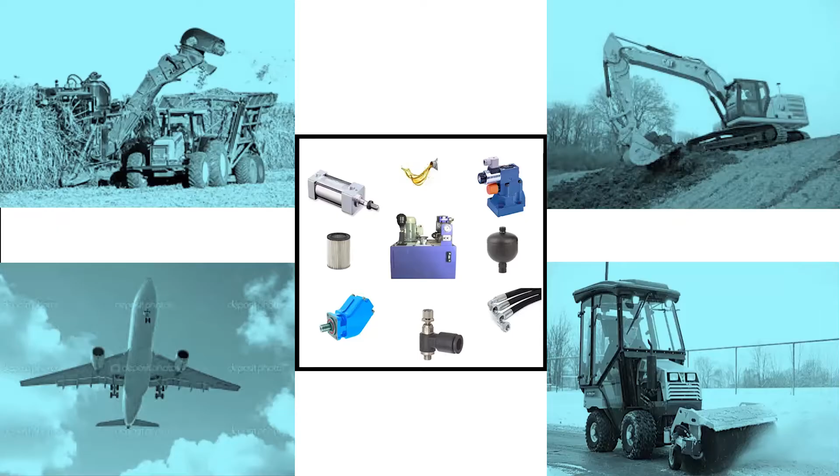This is in case of the single stage compressor. Now let us see the two stage reciprocating piston type air compressor. Here we are using two pistons of different diameter driven by a rotating crankshaft to pressurize the air. The pressure rating is up to 30 bar and even more. From the figure, here I am showing you the two stage reciprocating type compressor.

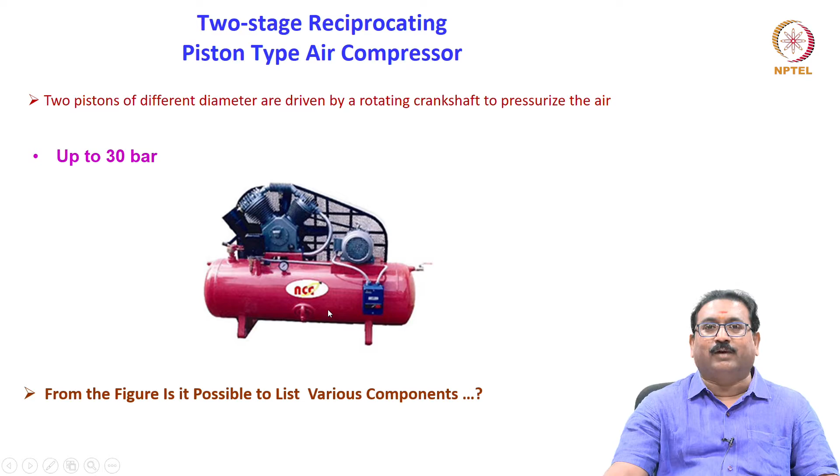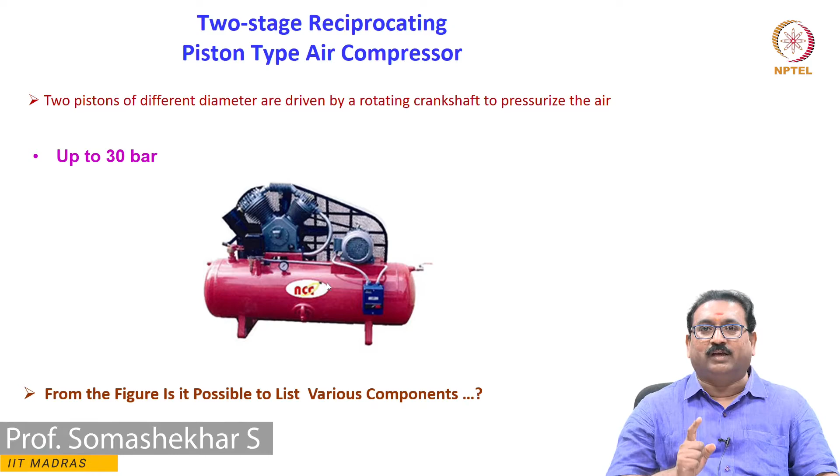You have seen these in many places in the workshop when putting air in your two-wheeler or cycle. As an engineer you must know the various parts of the compressor. Let us see this quickly. I will show you the external parts, then we will go to the internal parts.

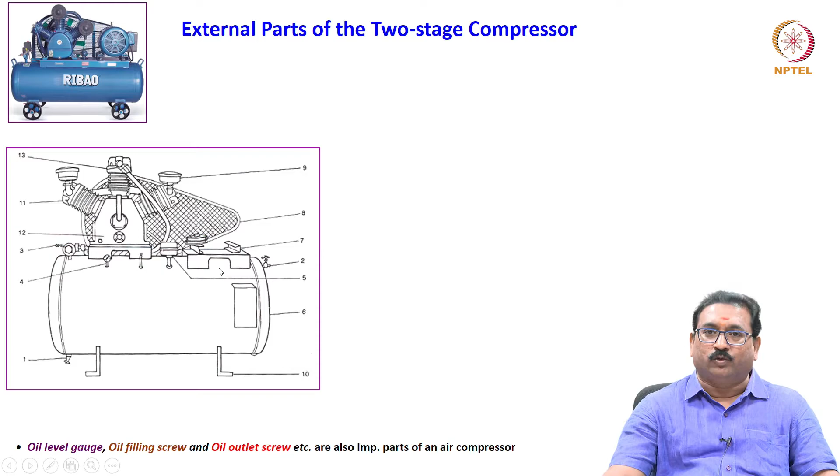See here, the first one is the drain valve or water outlet, always at the bottom of the receiver tank. That is why you should not take dry air from here, always from the top, remember. The second one is the compressed air outlet, always on the top side.

The third one is the safety valve. As I have told you, if the required pressure and volume is reached, it will automatically stop. The fourth one is the pressure gauge, to monitor the pressure.

What is the fifth one? The fifth one is the pressure switch, to switch on and switch off your motor. The motor I have not shown here.

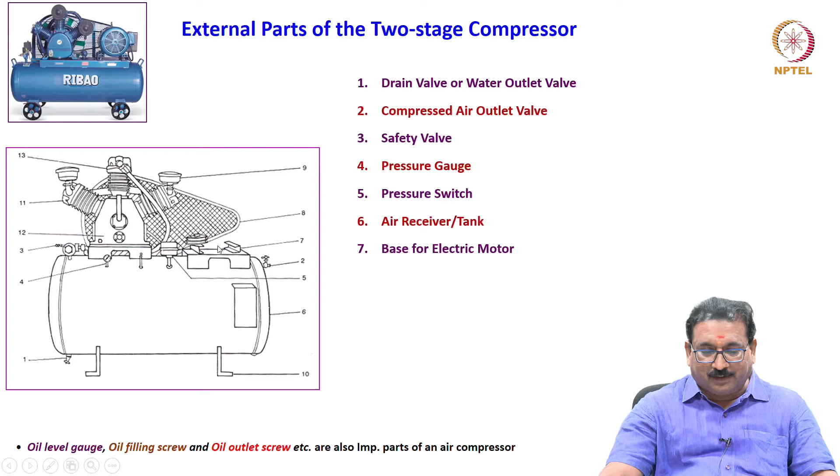The sixth one is the air receiver or tank. The seventh one is the space provided to put the electric motor. The eighth one is the safety guard. The ninth one is the suction filter or intake filter.

The 10th one is the compressor stand, rigidly mounted on the ground. The 11th one is the first stage cylinder.

The 12th one is the oil reservoir or oil tank, for the lubrication purpose.

Here is the second stage cylinder, as I have told you - first stage cylinder, second stage cylinder. Also remember, the oil level gauge, oil filling screw and oil outlet screw are important parts of the compressor. If you see any compressor physically, you should be able to identify these important parts.

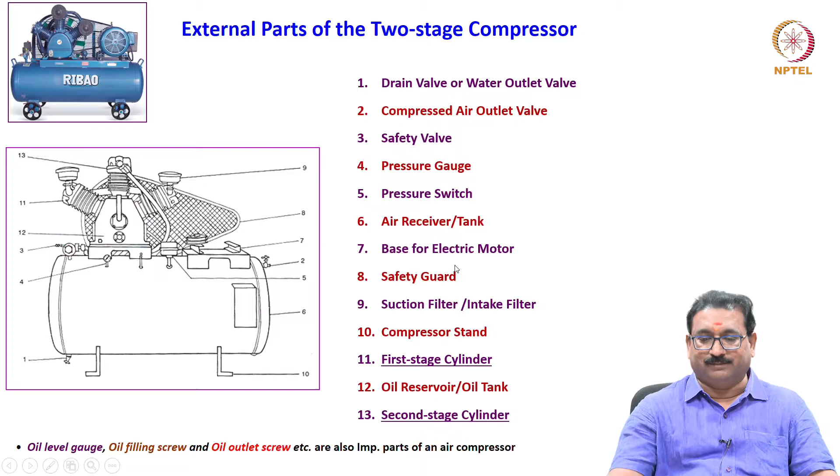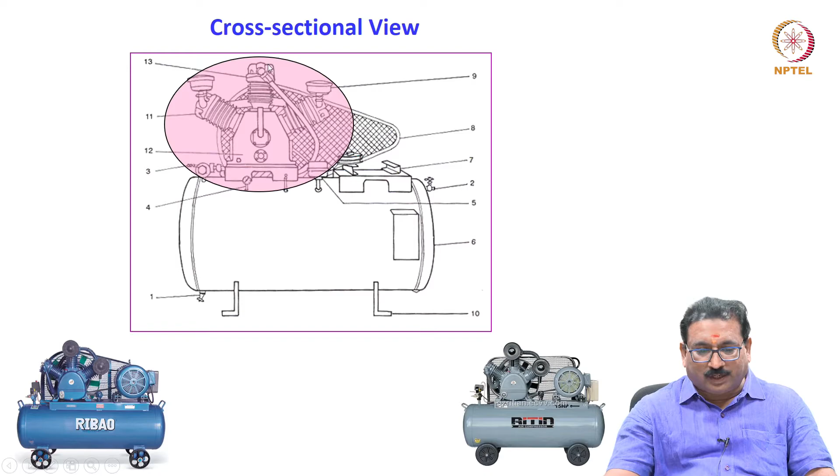Now this includes both the single stage and two stage, whatever it is, with intercoolers in between and many other things. I will show you the cut section of this now, with what I have marked here.

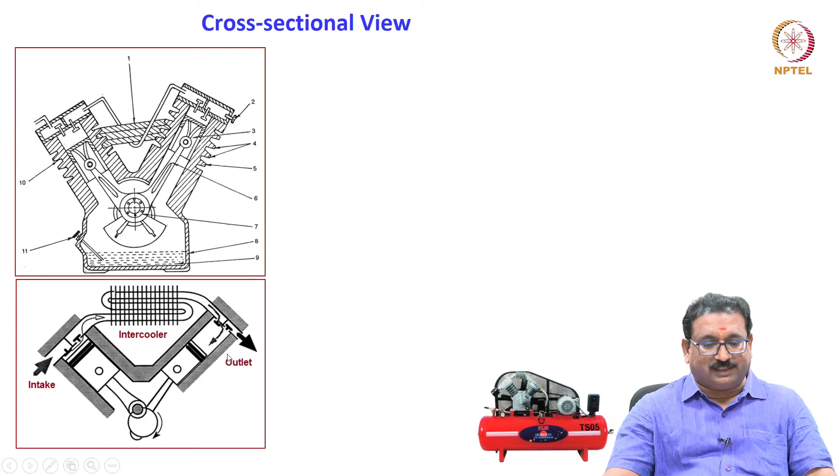You will see here the cut section, how it is - the inlet, outlet, whatever it may be. You will see the first stage cylinder, second stage cylinder. Let us see now.

Here the first one is what we call the intercooler element. The intercooler is nothing but a heat exchanger. The air, when it moves from the first stage to second stage, should be cooled. That is why intercoolers or heat exchangers are required, and they can be water cooled or air cooled.

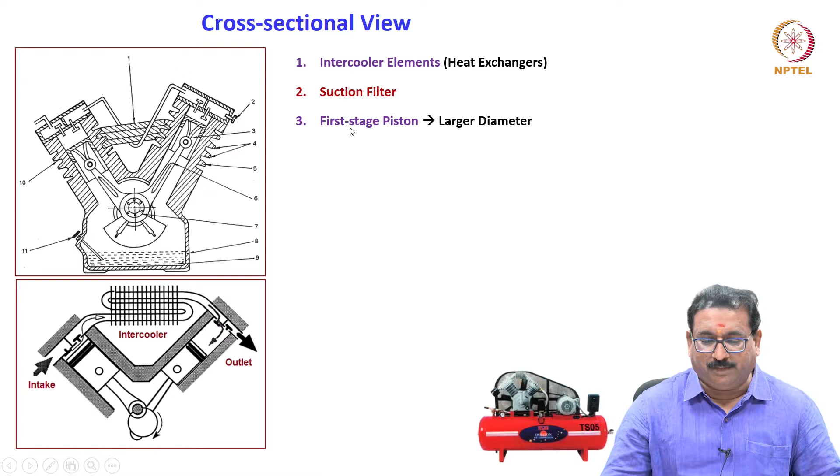Where is the suction filter? Number 2 here is the suction filter. Number 3 is the first stage piston, shown here, it is the first stage, here it is the other way - first stage cylinder, larger diameter.

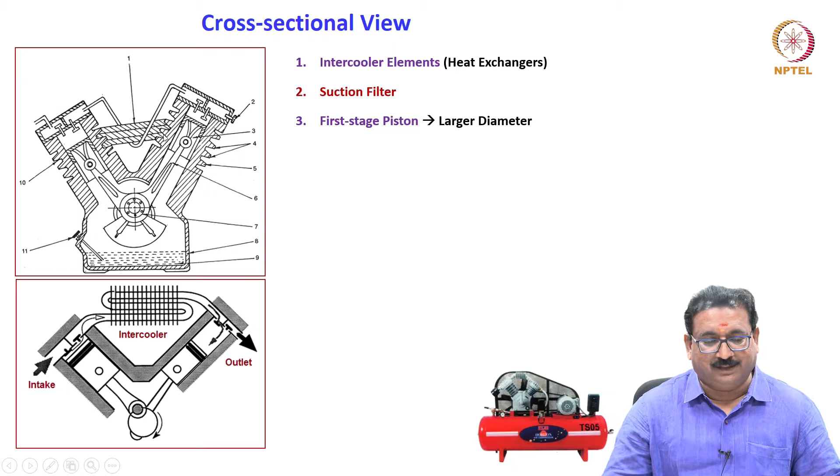Don't confuse with this figure - it has a larger diameter and a smaller diameter. The larger diameter is always the first stage, the smaller diameter is the second stage. You see the pistons. Cooling fins, as I have told you, are also provided, for cooling the compressed air. The fifth one is the first stage cylinder, also known as the low pressure cylinder compared to the other.

Then the piston rod - this is the piston rod. Then the crank and crankshaft arrangement, number 7, which is connected to both the piston rods. Please see, both piston rods are connected. Then the crankcase, the 8th one, full crankcase.

The 9th one is the oil container, with oil inside. Then the second stage cylinder, as I have told you - here in this figure it is the second stage cylinder, the high pressure cylinder, where compression takes place again. Then the 11th one is the dipstick and oil filter.

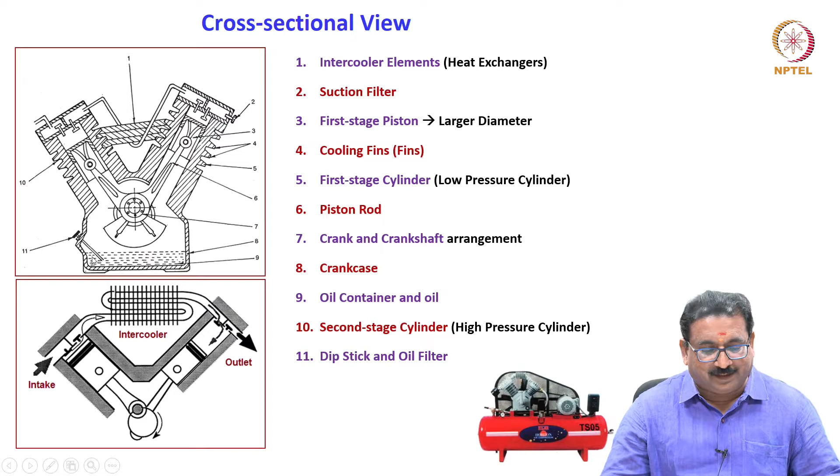Now how it works, I will tell you very quickly. As we know, the first stage cylinder is a larger diameter and the second stage cylinder is a smaller diameter piston. What is the working principle? Very quickly friends, when the piston is moved down from the top dead center to bottom dead center, air is sucked through the filter; filters are not shown here.

Then when it moves up, what happens? The air sucked is discharged through the intercooler and it enters the second cylinder. Then when it moves, again it will compress a second time, then it will go to the receiver tank. You will see here friends, cylinder 1, cylinder 2, first stage, second stage. The same figure is for easy understanding.

I have shown the inlet valve and outlet valve here. As the piston descends during the inlet stroke, descends means from top to bottom, the inlet valve opens and the atmospheric air is drawn into cylinder 1 after passing through the suction filter. As the piston passes the bottom of the stroke, the inlet valve closes. When it moves here, see here, the inlet valve closes.

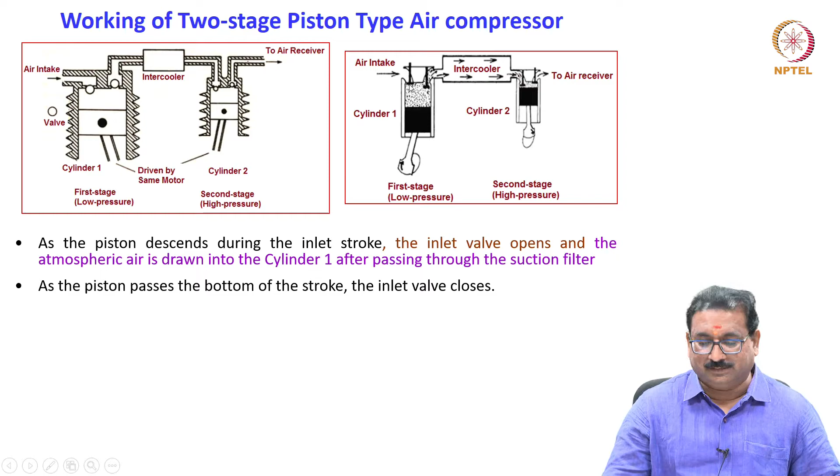The exhaust valve opens, allowing the air to be expelled as the piston rises into the cylinder 2 through the intercoolers. See here, when it moves up, this will open. Here, through the intercooler, air is entering the next cylinder.

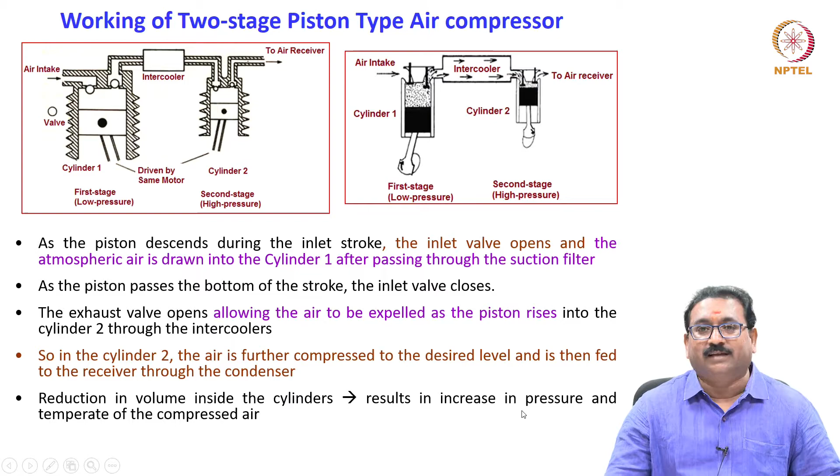So in cylinder 2, the air is further compressed to the desired level and is then fed to the receiver through the condenser. Reduction in volume inside both cylinders results in an increase in pressure and temperature of the compressed air. Okay, very quickly you will see. So the hot air is cooled, as I have told, by intercoolers.

How is it? Air circulation uses circulating fans that circulate the air through the fins on the cylinder and the intercoolers, or water circulation provides water jackets around the cylinder, and water is also circulated in the intercooler tubes.

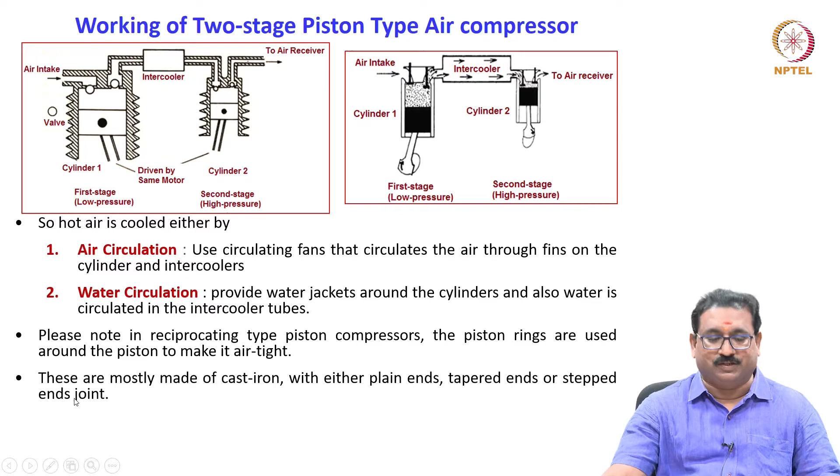Please note, in a reciprocating type piston compressor, piston rings are used around the piston to make it airtight. They are mostly made of cast iron with either plain ends, tapered ends or stepped end joints. The compressor needs reasonable lubrication to maintain a longer trouble-free life.

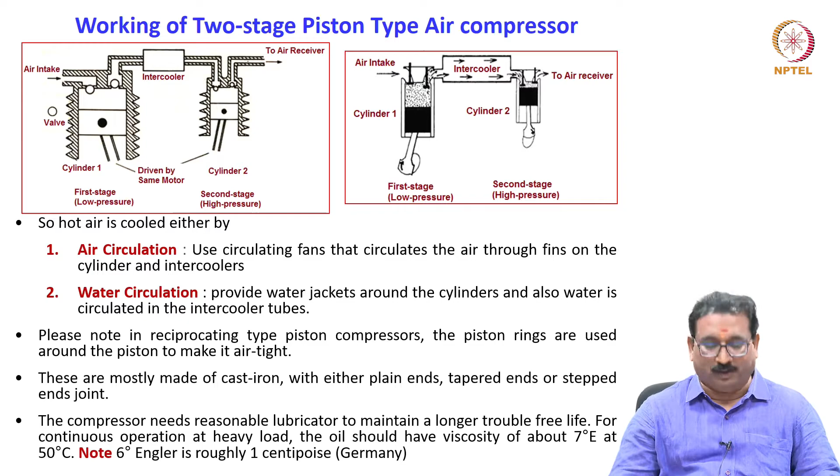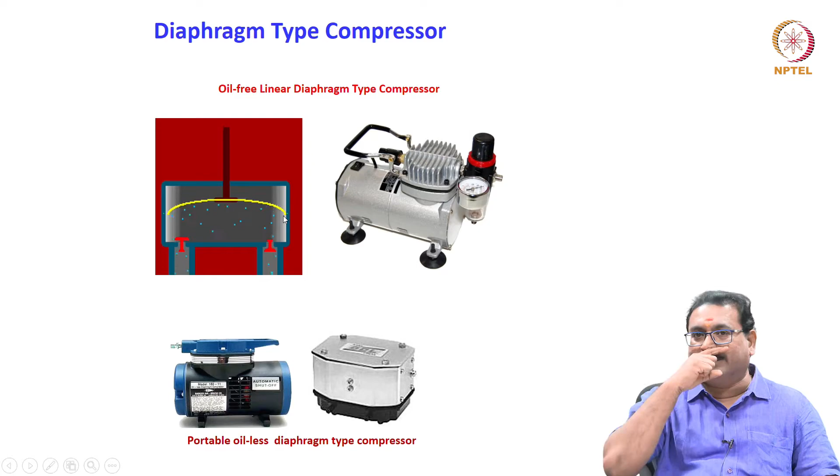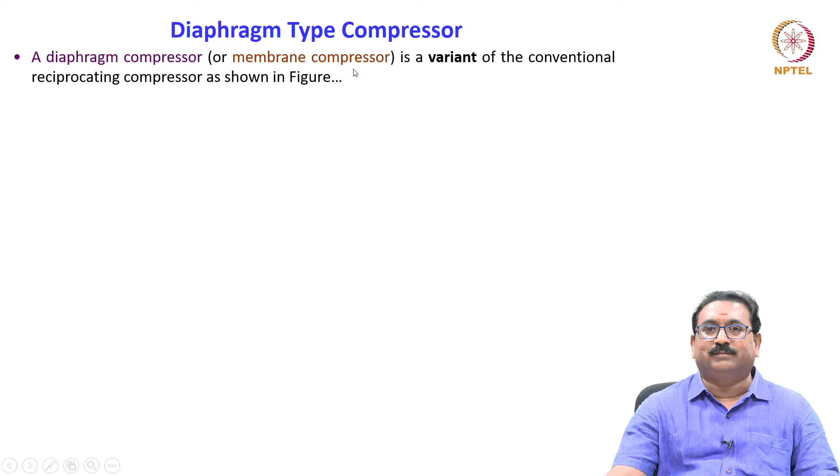But the only problem you will see here is that the movement of this flexible membrane is very small. That is why it is used for low pressure applications. Quickly we will see what a diaphragm type air compressor is. A diaphragm compressor, also known as a membrane compressor, is a variant of the conventional reciprocating type compressor. It comes under the reciprocating type, as I have shown you here.

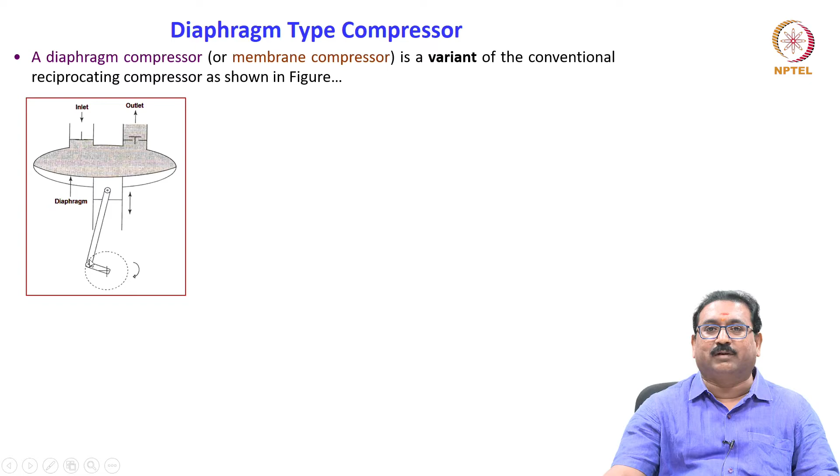It is the same thing. This is a piston, and this is a diaphragm element. This will move up and down due to the movement of the piston. Here you will see the piston is separated from the friction chamber by a flexible diaphragm. That is, air does not come in contact with the reciprocating parts. Thus, the air is always kept free of oil.

Compression of the air occurs by the movement of the flexible diaphragm as the piston reciprocates up and down. You will see here, when the piston moves down, air will be sucked. When it moves up, air will be discharged. These are limited to very small capacity as the diaphragm displacements are very small.

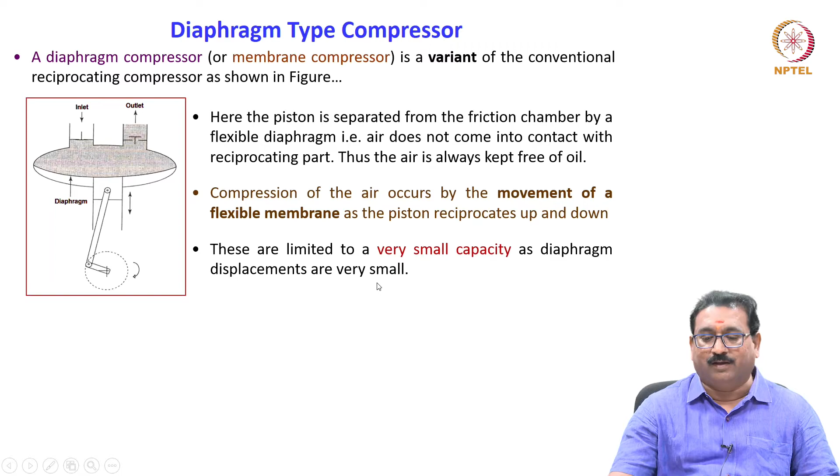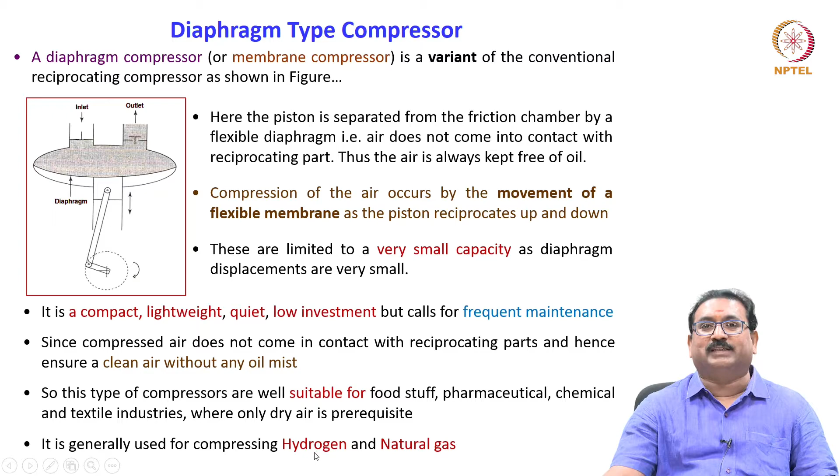It is compact, lightweight, quiet and low investment, but calls for frequent maintenance, because the flexible diaphragm is very sensitive. Since the compressed air does not come in contact with the reciprocating parts, it ensures clean air without oil mist, so this type of compressor is well suited for foodstuff, pharmaceutical, chemical and textile industries, where only dry air is a prerequisite. It is generally used for compressing hydrogen and natural gas.

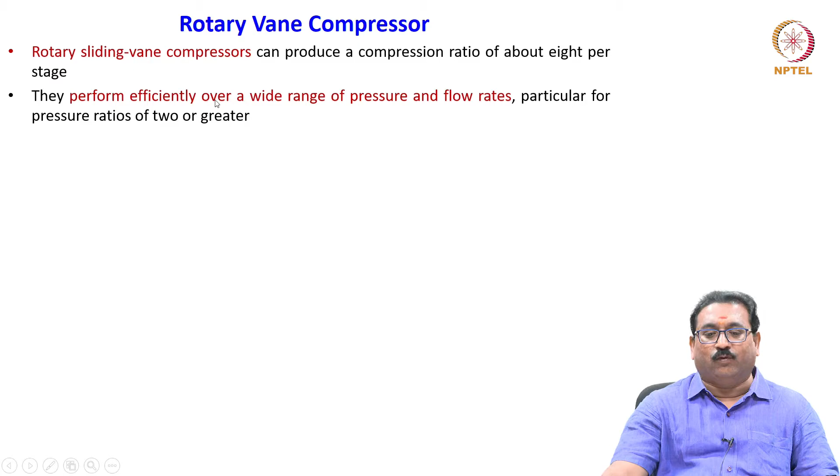Now we will move on to the rotary type compressors. What are these? We will see the rotary sliding vane first. A rotary sliding vane compressor can produce a compression ratio of about 8 per stage. They perform efficiently over a wide range of pressure and flow rates, particularly for pressure ratios of 2 or greater.

They are pulse free and therefore can be used without a receiver if needed. A simple schematic diagram of a vane compressor is shown in the figure here. Please see here, friends, all the arrangements here, the mating elements are similar to your vane pump. Here you will see this is a rotor block, which is a slotted rotor; slotted vanes are there, slots are there, a slotted rotor it is. Then the cylinder block you will see.

The rotor and cylinder blocks are offset, you will see the axes are offset. Then vanes are there; these vanes are inserted in the radial slots of the rotor block. When the rotor rotates, the vanes will reciprocate in and out. The compressor consists of a simple vane type rotor enclosed in a stator body, having a low pressure and a high pressure bore for 2-stage machines.

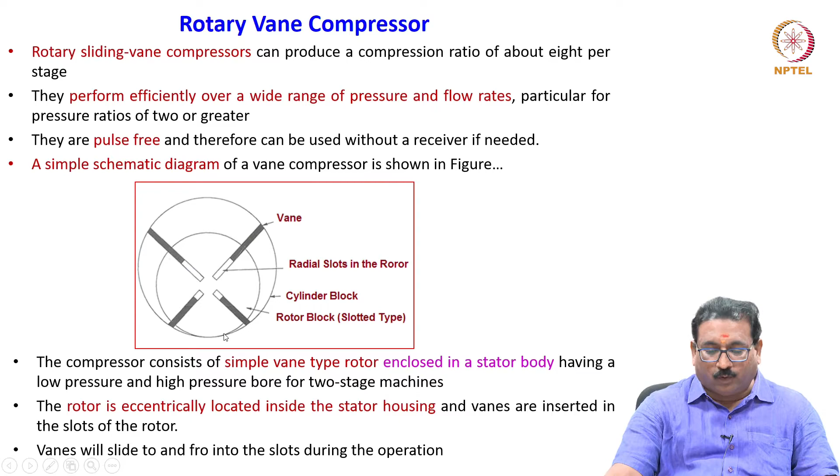The rotor is eccentrically located inside the stator housing and vanes are inserted in the slots of the rotor. These vanes will slide to and fro in the slots during operation. For the purpose of lubrication, oil is injected into the housing at both stages and performs the following functions: lubricating the bearings, gears and many other parts, cooling the air while it is being compressed, and sealing all the clearances.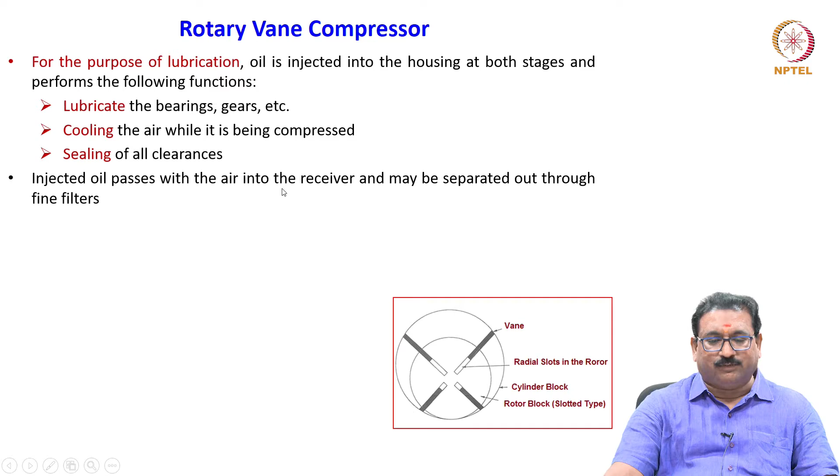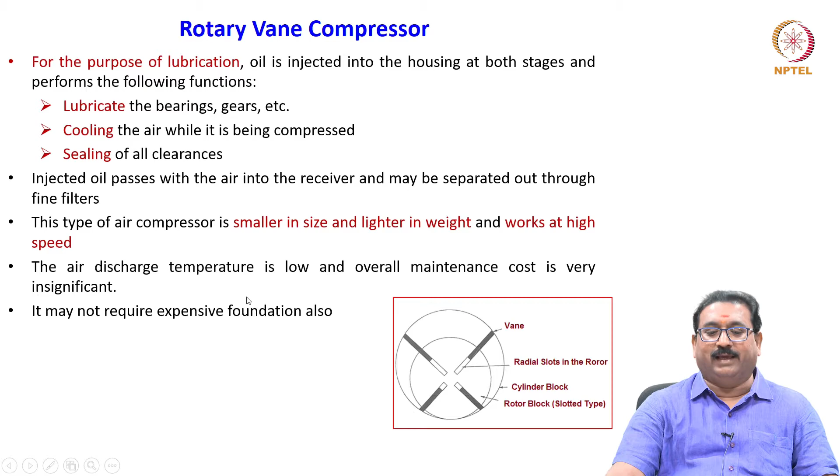Injected oil passes with the air into the receiver and may be separated out through fine filters. This type of air compressor is smaller in size, lighter in weight and works at high speed. The air discharge temperature is low and overall maintenance cost is very insignificant. It may not require an expensive foundation either.

Now we will move on to the lobe compressor. As I have told you, based on the lobes, 2 lobe and 3 lobe compressors are there. Let us see the 2 lobe, also known as the twin lobe compressor. What is it? The 2 lobes are enclosed in the casing. This whole is the casing.

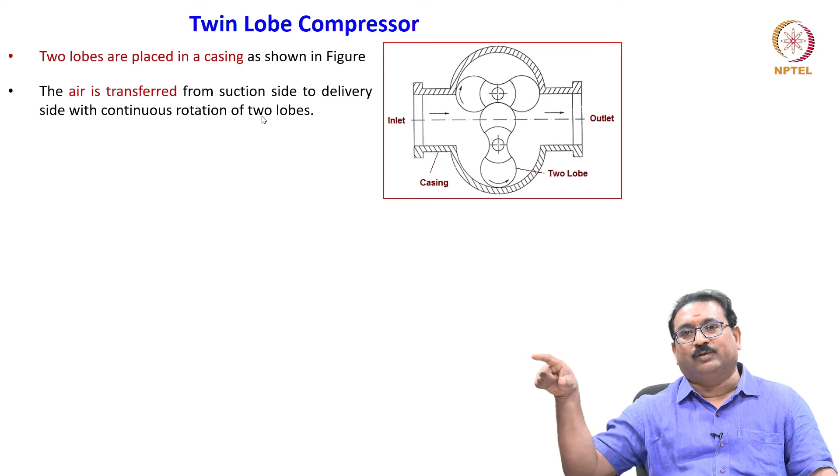The air is transferred from the suction inlet to the delivery side with the continuous rotation of these 2 lobes. They rotate because one is connected to the motor, meaning the electric motor; when it rotates, the other will move. They transport the air from suction to discharge. There is practically no volume change here. The pressure generated is generally very low and it is mostly used for low pressure applications. No internal compression takes place, but the impeller forces the air through the discharge opening against the back pressure of the system.

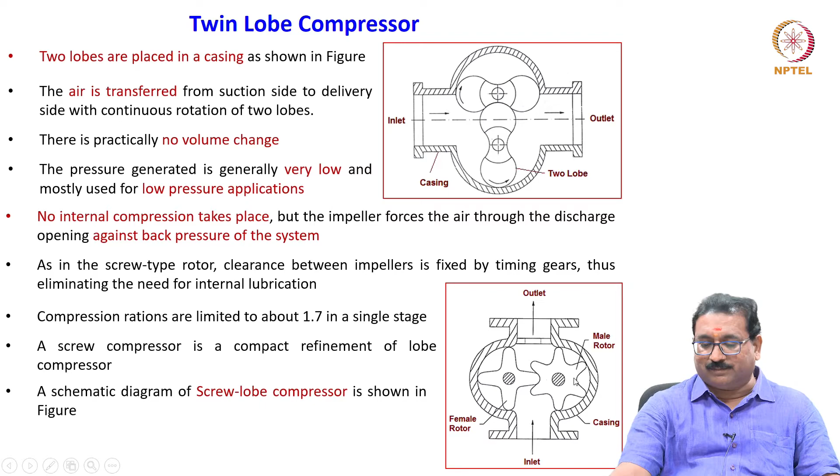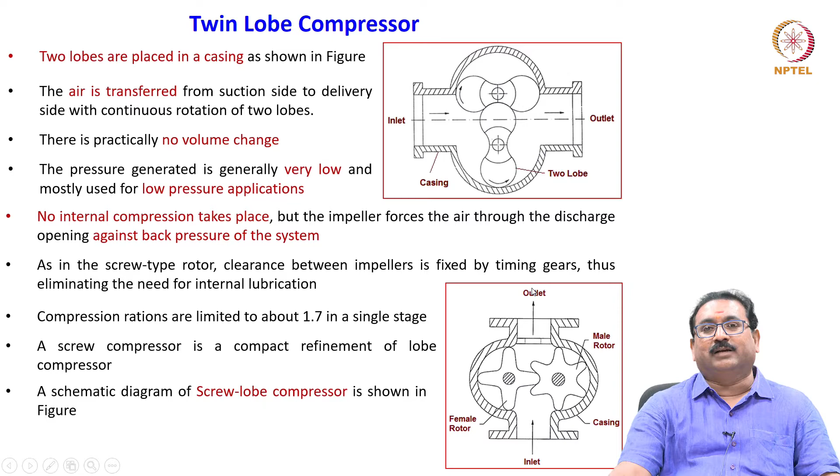As in the screw type rotor, clearance between the impellers is fixed by the timing gears, thus eliminating the need for internal lubrication. Compression ratios are limited to about 1.7 in a single stage. A screw compressor is a compact refinement of a lobe compressor. A schematic diagram of the screw lobe compressor is shown in the figure, which consists of a male rotor and a female rotor enclosed in the housing. Air is sucked from the inlet and only transferred from the inlet to the outlet.

Now we will move on to the rotary screw type compressor. In the rotary screw type compressor, 2 screws, one with a convex contour and the other with a concave contour, generally called the male rotor and female rotor respectively, are made to rotate by means of a gear train or other mode outside the compressor casing, thereby sucking air through the inlet port into the chamber, compressing it inside the chamber, and finally discharging it through the outlet port.

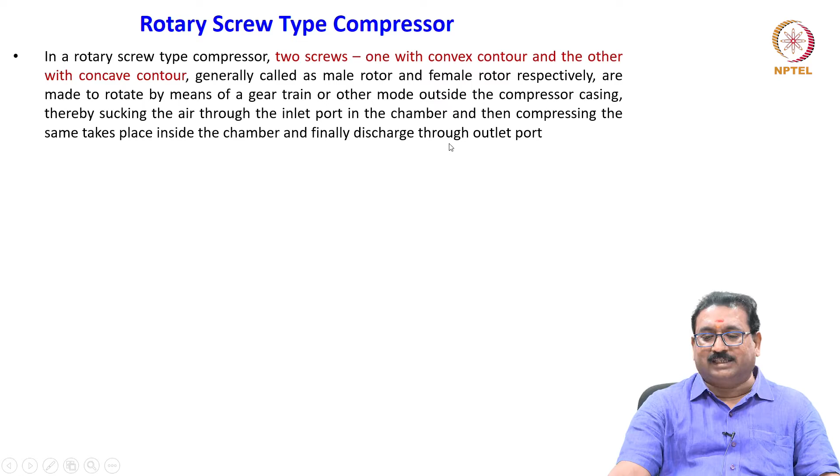Compression and discharge. Screw compressors are high speed machines, which necessitates the use of suction and discharge silencers and other means to reduce the noise level. The air delivery is usually oil free unless the compressor is of special design, in which case oil is injected for cooling and sealing of the clearance space.

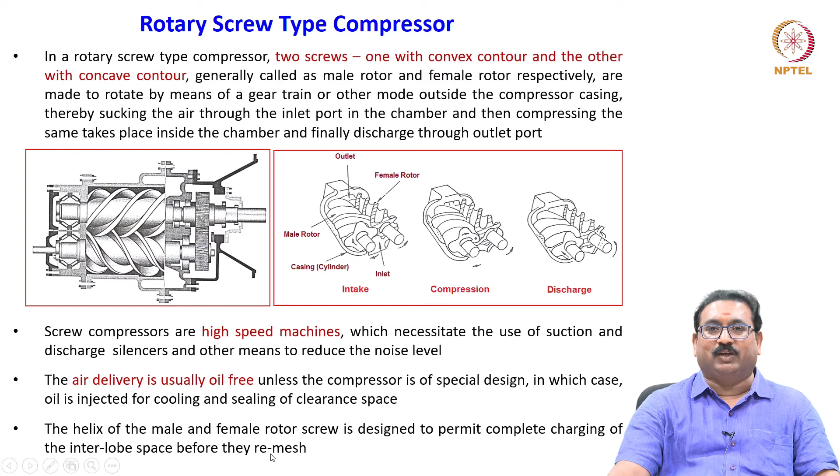The helix of the male and female rotor screws is designed to permit complete charging of the interlobe space before they remesh. On completion of the filling operation, the inlet ends of the male and female lobes begin to re-engage each other, the volume of this space is reduced, compression begins, and the air is discharged at the other end. This is virtually a continuous process, one lobe following the other very closely, so that almost pulsation free compressed air is obtained.

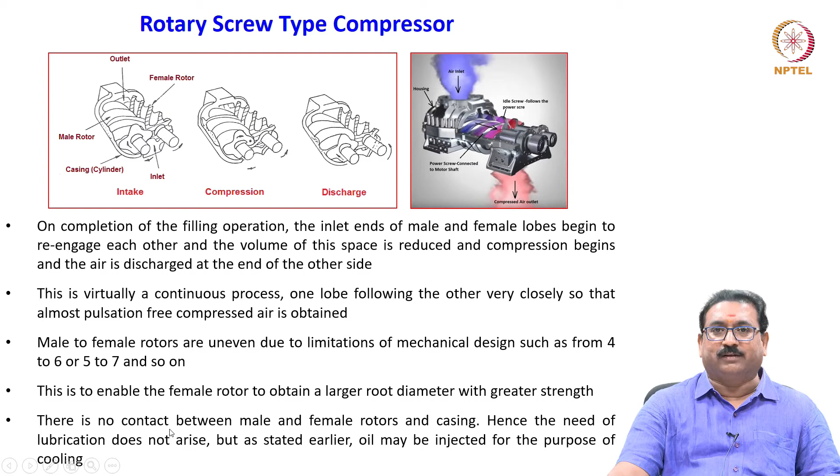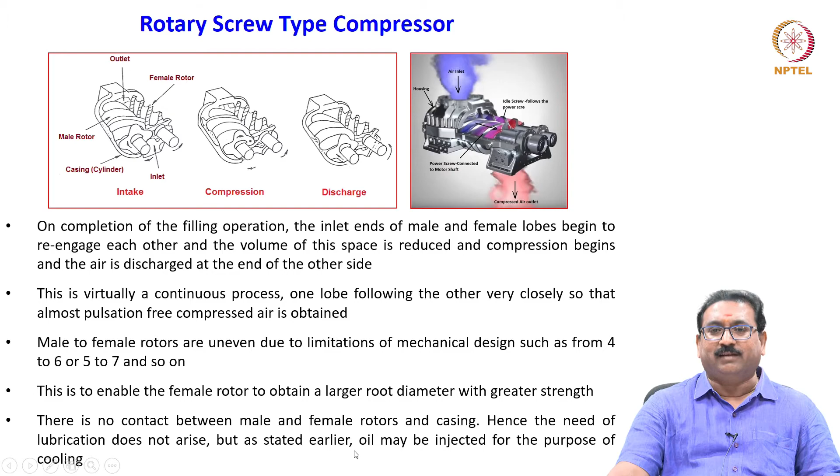Male to female rotor lobes are uneven due to limitations of mechanical design, such as from 4 to 6 or 5 to 7 and so on. This is to enable the female rotor to obtain a larger root diameter with a greater strength. There is no contact between the male and female rotors and casings. Hence, the need of lubrication does not arise. But as stated earlier, oil may be injected for the purpose of cooling.

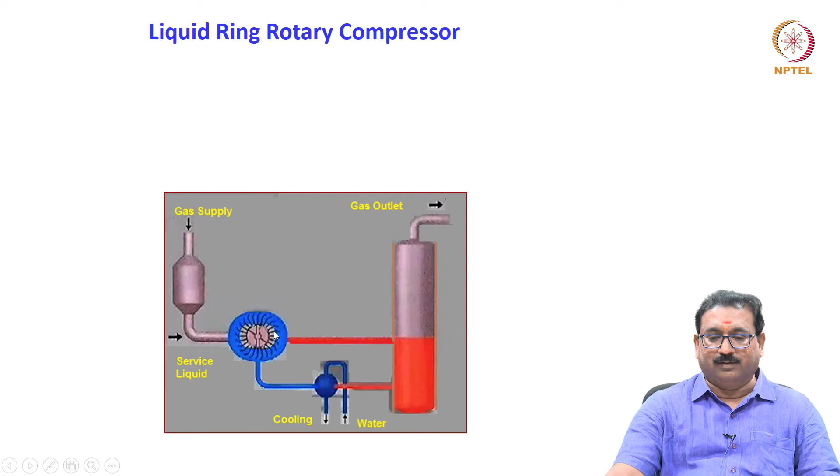Now, we will move on to the last type of rotary compressor, the liquid ring rotary compressor. Typically, a liquid ring rotary compressor is used as a vacuum pump, but can also be used as a gas compressor. It is similar to a rotary vane pump, with the difference being that here the vanes are an integral part of the rotor and churn a rotating ring of liquid to form the compression chamber seal.

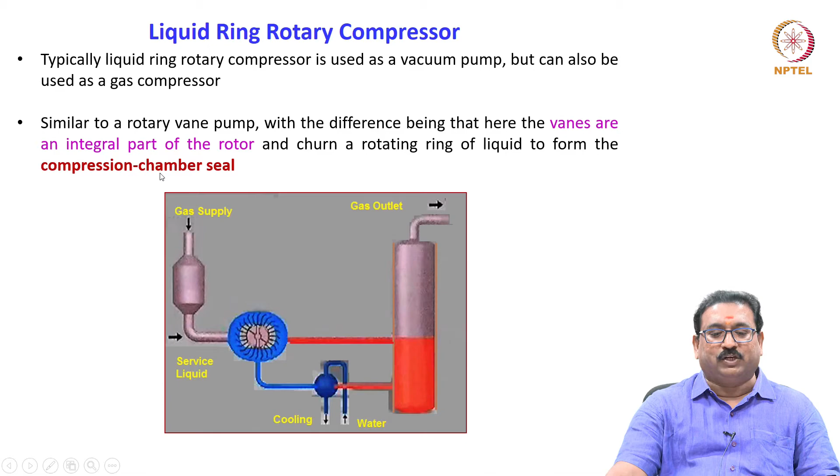Here you will see all vanes are an integral part of the rotor. The liquid ring rotary compressor consists of an impeller with at least 12 or more fixed forward curved blades, which is mounted eccentrically in the drum shaped casing between the two end plates. This is an impeller and this is a casing, mounted eccentrically.

As the impeller rotates, the sealing liquid moves out by centrifugal force to the walls of the casing, forming the ring. The air is drawn into the compressor by the expanding pockets trapped between the liquid ring and the impeller hub. This is the increasing volume. Air is trapped here between the liquid ring and these pockets.

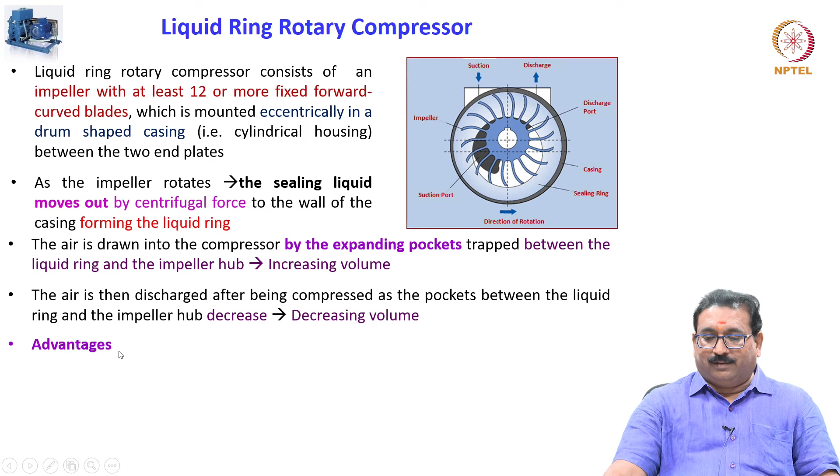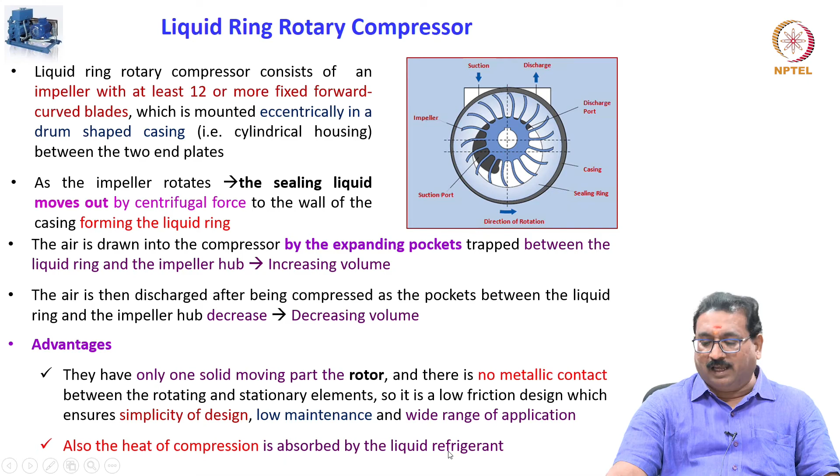The air is then discharged after being compressed, as the pocket between the liquid ring and the impeller hub decreases, through the discharge port. The advantage is they have only one solid moving part, the rotor, the impeller, and there is no metallic contact between the rotating and stationary elements. It is a low friction design which ensures simplicity, low maintenance and a wide range of application. Also, the heat of compression is absorbed by the liquid which forms the ring.

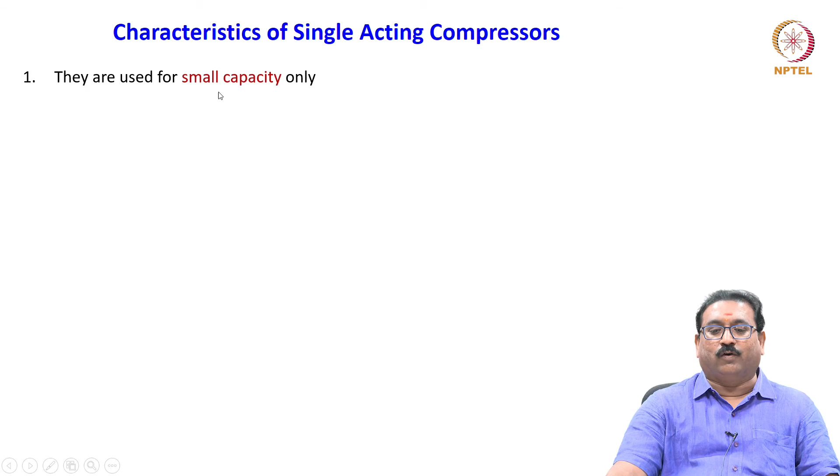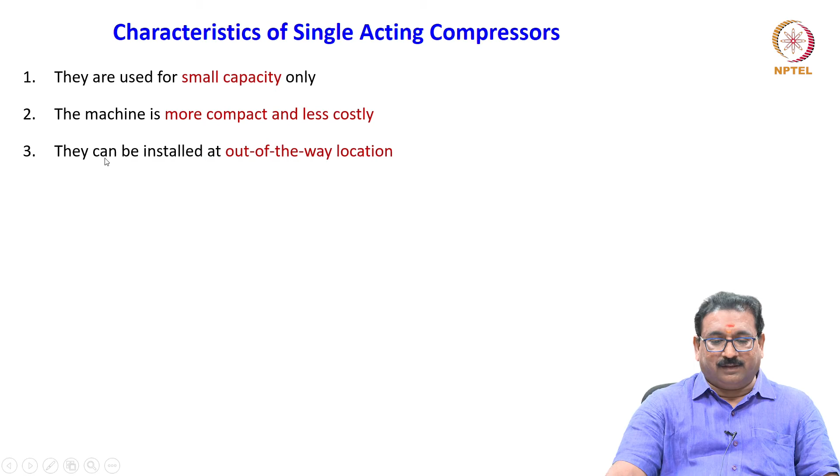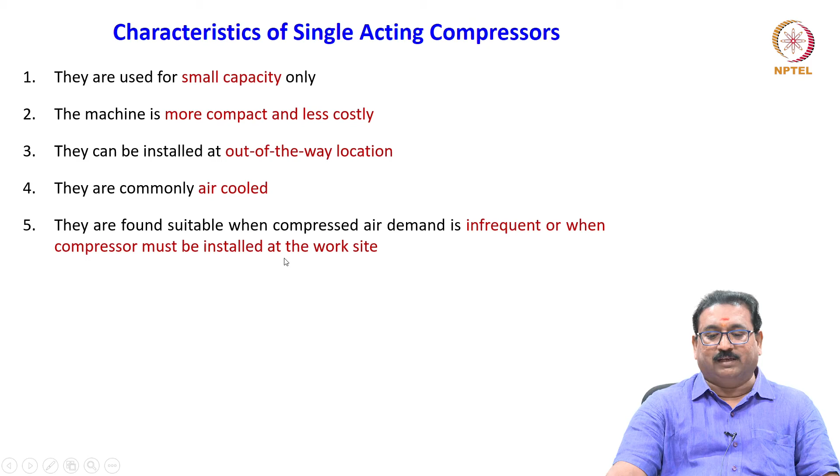Now, quickly we will see the characteristics of single acting compressors. They are used for small capacity only. The machine is more compact and less costly. They can be installed at out of the way locations. They are commonly air cooled. They are suitable when the compressed air demand is infrequent or when the compressor must be installed at the work site. Similarly, we will see some of the characteristics of double acting compressors.

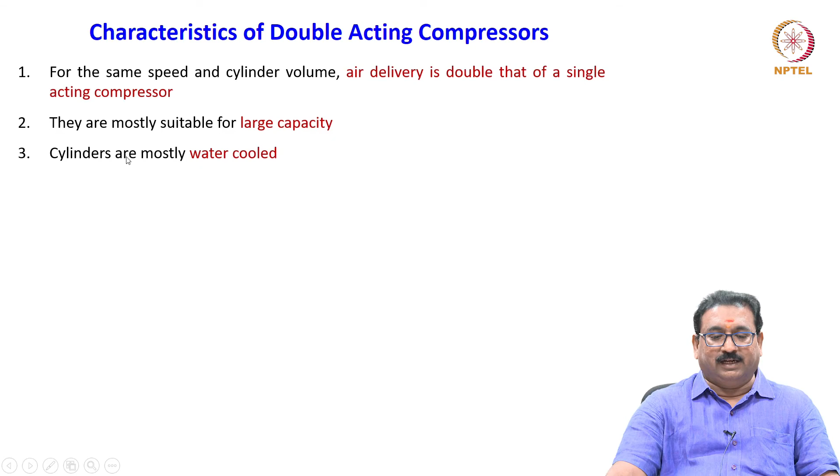For the same speed and cylinder volume, air delivery is double that of the single acting compressor. They are mostly suitable for large capacity. Cylinders are mostly water cooled. They are normally used for continuous and heavy duty work. Higher speed of piston while reducing the size of compressor may contribute to greater wear of the piston rings, cylinder liners and packings. Preferable piston speed for a small capacity compressor is 300 meters per minute, for a large capacity compressor 250 meters per minute. Lower discharge temperature, mostly 240 degrees centigrade for single stage and 140 degrees for two stage compressors.

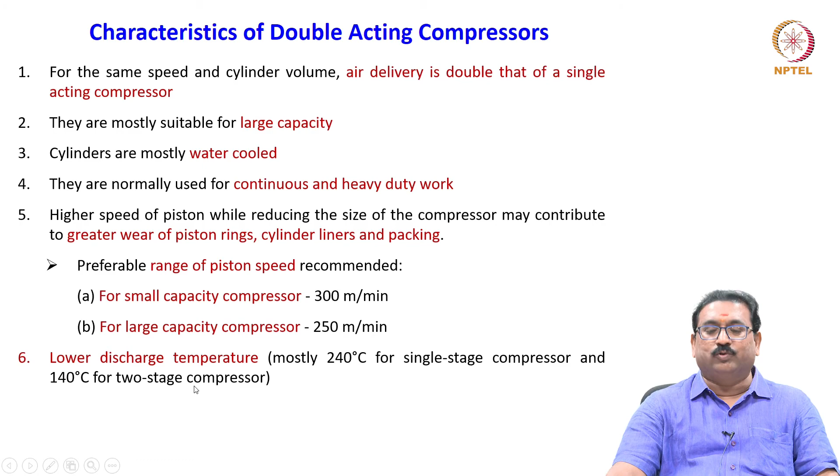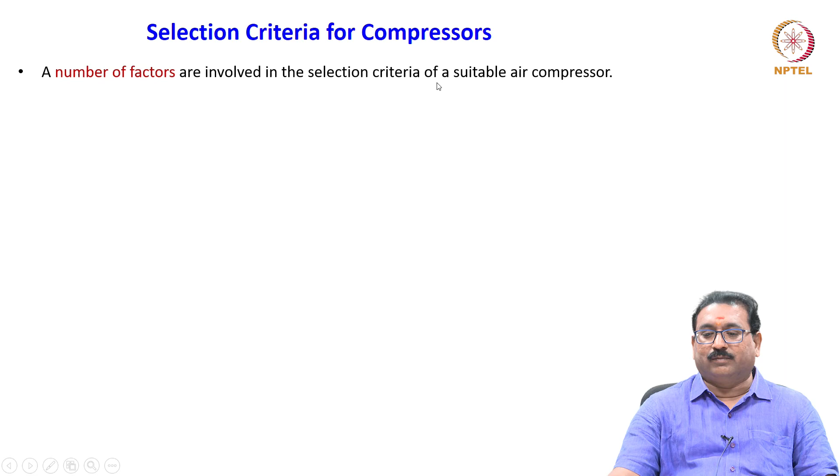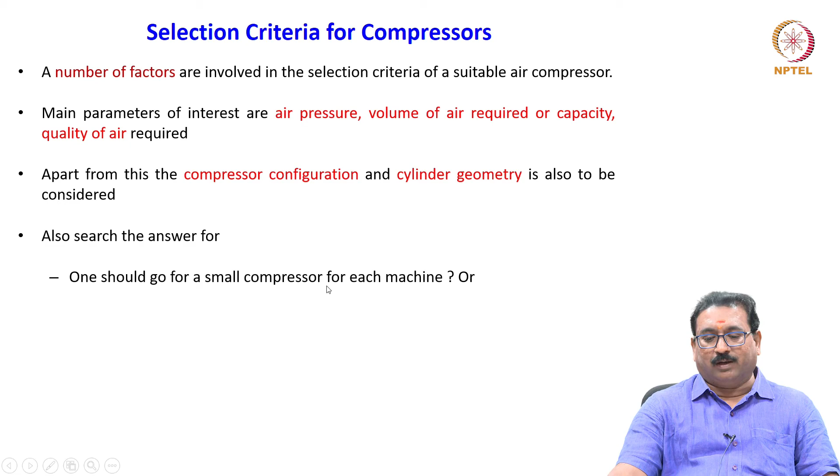Let us move on to selection criteria for compressors. A number of factors are involved in the selection of a suitable compressor for the particular application. The main parameters of interest are air pressure, volume of air required or capacity, and quality of air required. Apart from this, the compressor configuration and cylinder geometry are also to be considered. Also ask whether one should go for a small compressor for each machine, or a centralized compressor like a powerhouse. The answer will depend on the pipeline layout, system requirement and the distance of the user machine from the plant.

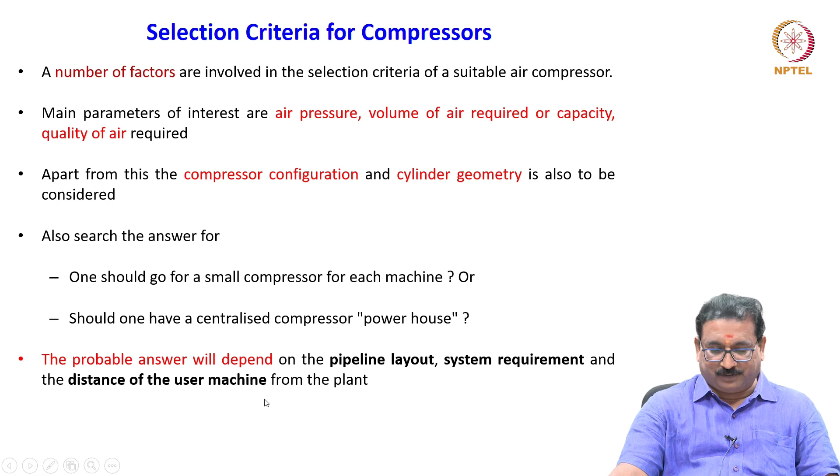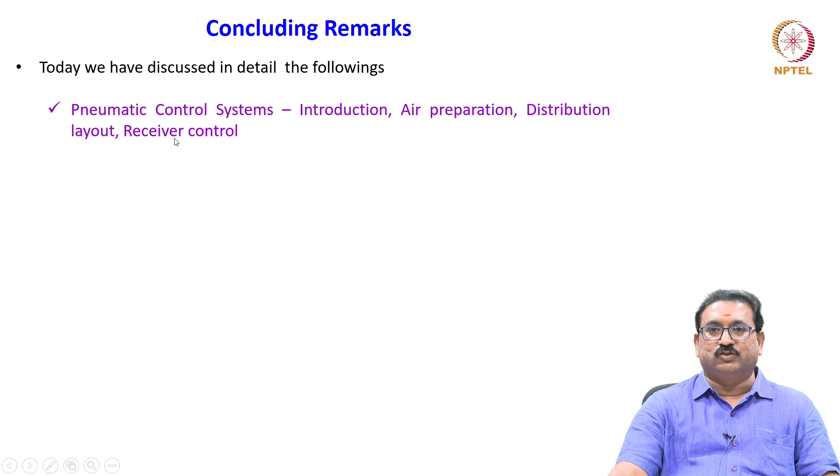Let us conclude today's lecture. Today we have discussed pneumatic control systems: introduction, air preparation, distribution layout, receiver control. Then we discussed various types of air compressors, focused mainly on the reciprocating air compressor, piston type and diaphragm type. In rotary compressors, we discussed vane type, lobe type, screw type and water ring air compressors. Also we discussed the major factors to be considered while selecting air compressors for different applications.